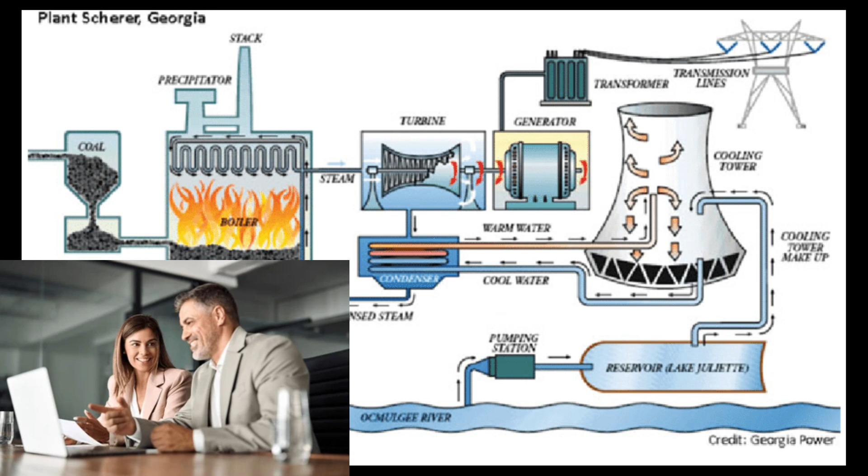That is just an astonishing amount of force and heat. But why push things to such extremes? What's the thermodynamic advantage? Why operate like that?

Right, that's the key question. Well, it boils down to efficiency. Operating at such high pressures and temperatures allows for incredible efficiency, often exceeding 90%. It really pushes the boundaries, maximizing the energy you can get from the water and steam, minimizing losses. And this kind of design also means really quick startup times, better heat transfer, all in a surprisingly compact structure for the amount of steam it kicks out, which makes them perfect for these huge power plants where every bit of efficiency counts, and you need to respond fast to demand. The efficiency gains are really staggering.

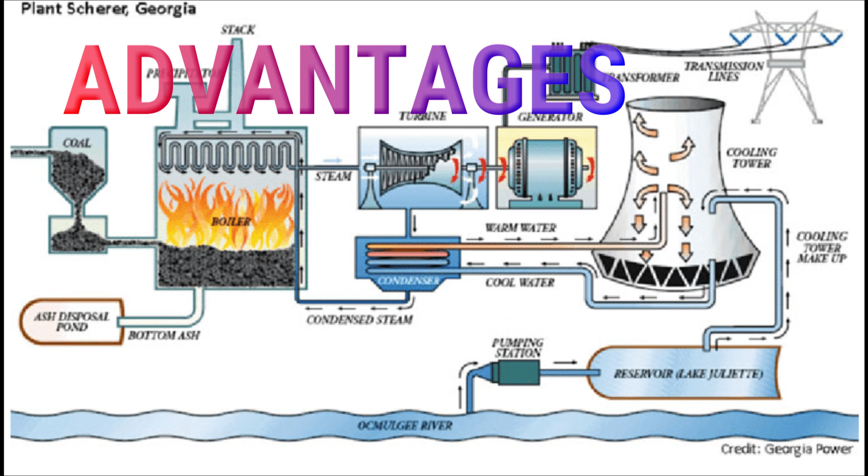But how did engineers actually manage to push past those limits? This brings us to some pretty ingenious designs. My notes mention something called a Benson boiler. How does that one work, especially operating without a normal boiler drum? That seems counterintuitive. That's a great point. The Benson boiler's genius is its once-through design. Basically, water is forced through one long, continuous tube. It gets heated gradually, goes past its boiling point, all in that tube. Critically, you eliminate that big, bulky boiler drum, the part that usually separates steam and water. So it simplifies construction, saves on materials, allows for much faster startups, and really rapid changes in load.

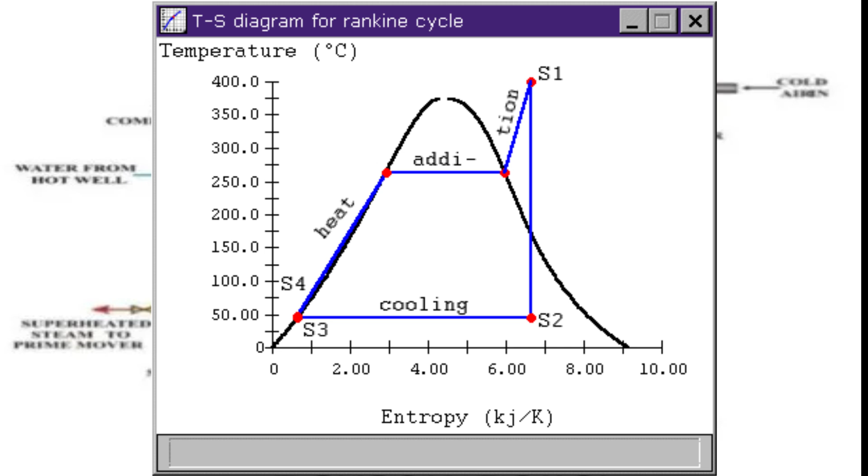Very flexible. But connecting this to the bigger picture, it gets even more mind-bending when you look at supercritical boilers. Supercritical boilers, okay, now that sounds like something from science fiction. What's happening there? With supercritical boilers, the water is operating above its critical point, meaning the pressure and temperature are so extreme, water doesn't really have separate liquid and gas phases anymore. It becomes this single, homogeneous fluid. Wow, no boiling. Exactly, there's no boiling in the traditional sense. And the huge advantage there is you skip the whole latent heat of vaporization thing, which boosts thermal efficiency even further. Plus, it allows for incredibly fast heat transfer and load changes, ideal for the modern grid.

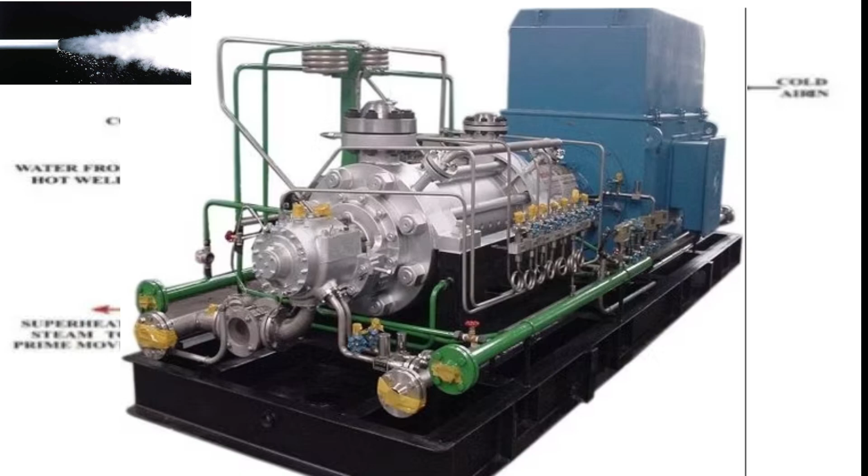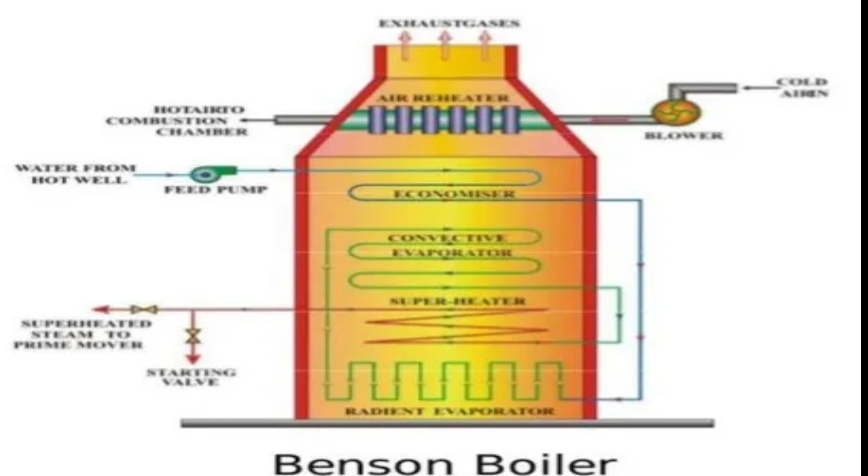And then there's also the Loeffler boiler, which is quite clever too. It uses superheated steam to actually evaporate the incoming feed water. Steam to evaporate water, how does that help? Well, the main benefit is it helps avoid scaling issues inside the boiler tubes, those damaging mineral deposits that build up like plaque. That clog things up. Precisely, they reduce efficiency and can even cause failures. The Loeffler design gets around some of that. It really is incredible, the level of ingenuity here.

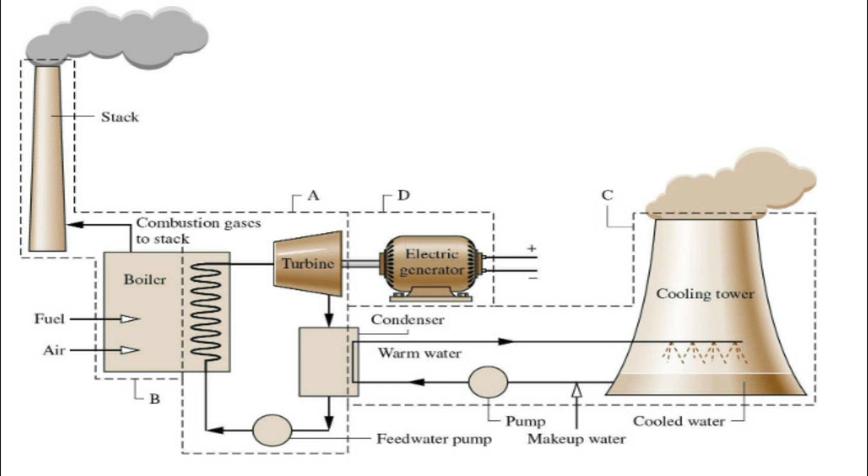So, from these complex designs, let's shift to where they actually impact us. Where do these powerful machines power our world day to day? And with such advanced systems, what are the big challenges? What makes them difficult to run? You find them pretty much anywhere large-scale energy is needed. Thermal power plants, obviously, generating a huge chunk of our electricity, but also vital in refineries, petrochemical plants, various big industrial processes, think textiles, food production, anywhere needing massive amounts of reliable, high-quality steam. Oh, okay, so they're really fundamental.

Absolutely. Now, as for challenges, yeah, there are significant ones. First off, the initial cost is incredibly high, these are major investments. Then you absolutely need highly skilled people to operate and maintain them, it's precision work, mistakes can be catastrophic. And a huge factor is water quality. They are very vulnerable to scaling and corrosion if the water isn't impeccably pure, that's a constant battle. So high cost, high skill needed, and very sensitive. Exactly. But despite all those complexities, their role in providing that large-scale power is, for now at least, pretty much irreplaceable.

So we've kind of journeyed through this unseen but utterly vital world of high-pressure boilers, from their frankly astonishing operating conditions and innovative designs to where they're actually used across industries and the inherent challenges that come with managing all that power. And I think that's really the core takeaway for you listening. Next time you flip a light switch, or maybe use almost any product that needed some kind of manufacturing, just take a second to consider the immense high-pressure, high-temperature engineering that's working away tirelessly behind the scenes to make that possible. These boilers, they're truly complex marvels underpinning so much of our modern life, yet, as we said, mostly out of sight.